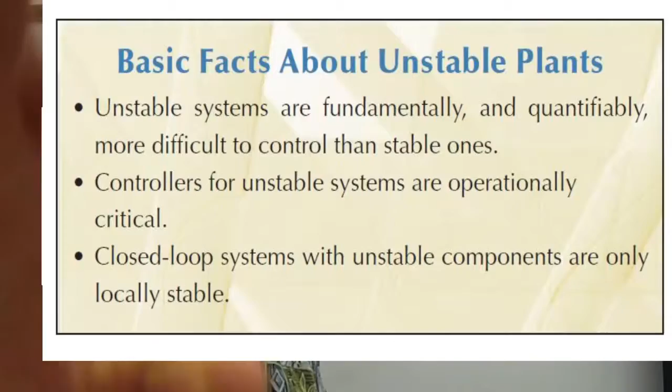So today we're going to start tying everything together and look at loop shaping the way I'm going to teach you. There's a bunch of different ways.

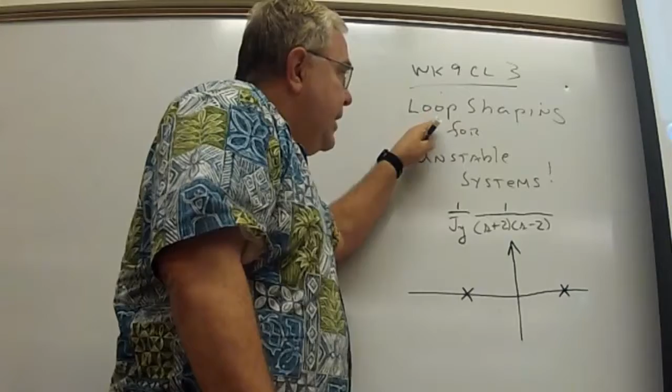But the inner SAS loop becomes crucial when you have an unstable system. It becomes crucial because you got to get these poles back into the left-half plane before you do loop shaping.

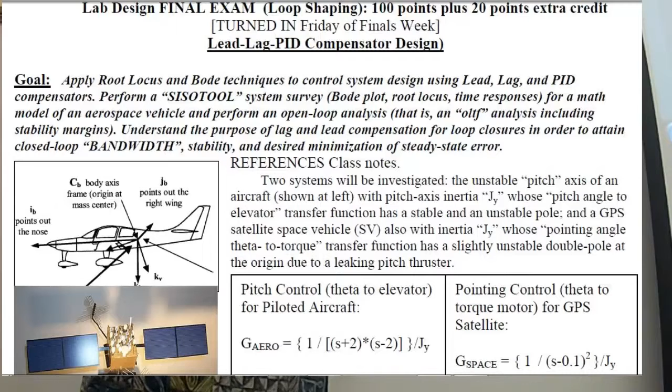And we're not going to deal with the really hard one, if I have a right-half plane zero that's going to suck up that pole, that makes it really difficult. You might have to call Gunter Stein at Honeywell and hire him to fix those problems, or use something like modern control to get started.

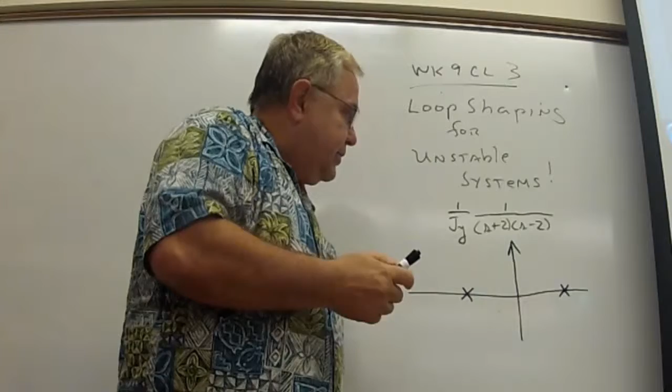So you can see why if I was doing loop shaping in a SAS on this F-16, F-18, any modern fighter that's unstable, you're going to have this type of situation. And the control engineers in the late 70s and early 80s prided themselves on being able to stabilize these systems with electronics, fly-by-wire. So they wanted to put this pole farther and farther out, because the farther out you put that unstable pole, the more maneuverable the aircraft becomes.

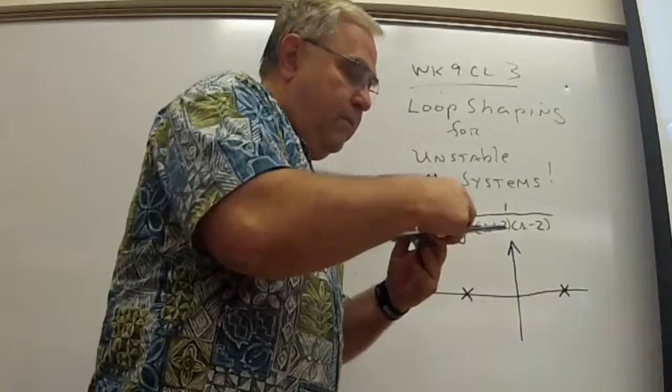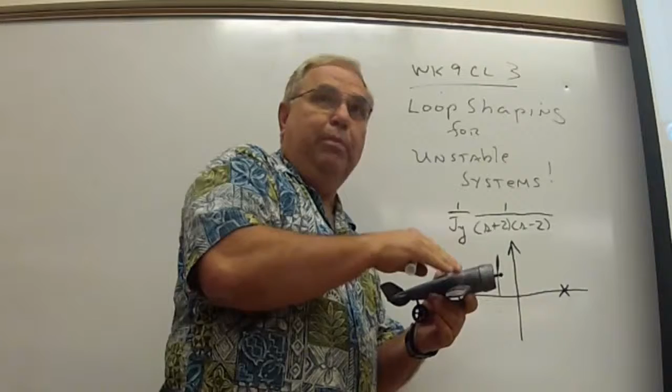It wants to go where you want it to go, like right now. And the F-16 is so maneuverable that I was telling the students last night in the extra office hours, it's so maneuverable that it will black the pilot out before he's aware that he's under a G-load. That's a very bad thing to do.

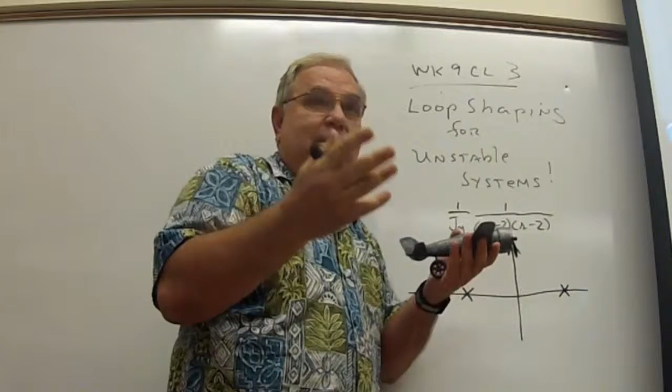Because if you know you're coming under G-load, then you can get your body ready for it. You can tighten up your muscles, you can force your blood, keep your blood up in your head area, up to 6, 7, 8 Gs. 9 Gs for some young men.

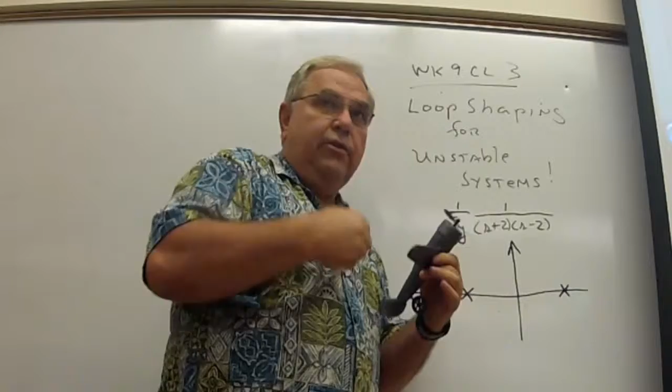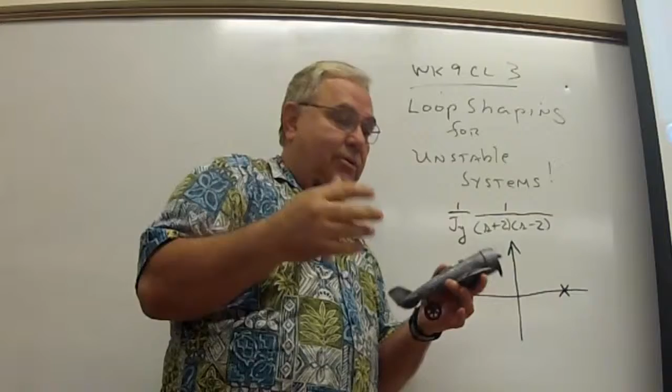But if your aircraft is too maneuverable, and you pull the stick back without warning someone, then you haven't done anything, and your blood instantly goes down away from your brain right away, and you black out with no notice. This happens to many F-16 pilots. Lost a few airplanes that way.

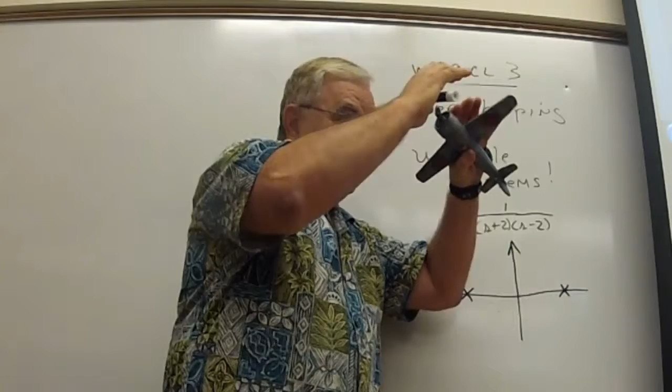Because when you wake up, it isn't like waking up from tunnel vision. Your tunnel vision goes out in the Gs, and then it comes back like that. But when you black out under a highly maneuverable blackout, it's like waking up in the morning. You wake up like you're in bed. Oh, you see the ground rushing up at you, and then you realize it's not a dream. You're actually in that airplane.

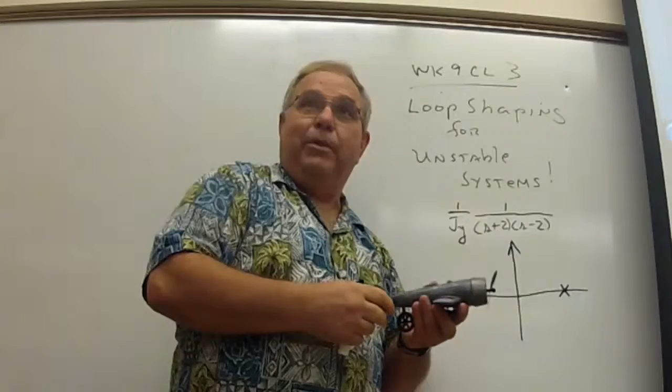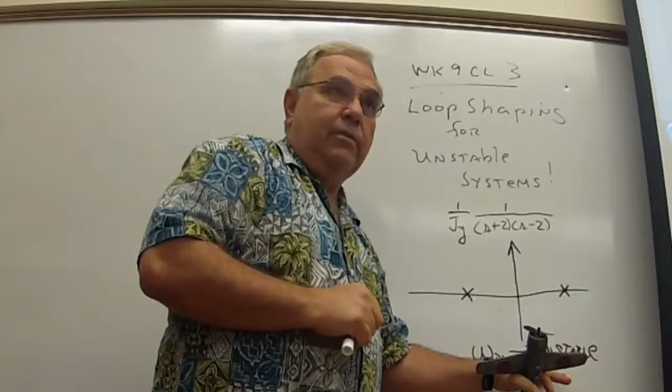So bandwidth now, for unstable systems, when we control them, bandwidth becomes the enemy of stability. The higher the bandwidth, the more problems you're inviting for lots of reasons. That's what we're going to pretty much cover today.

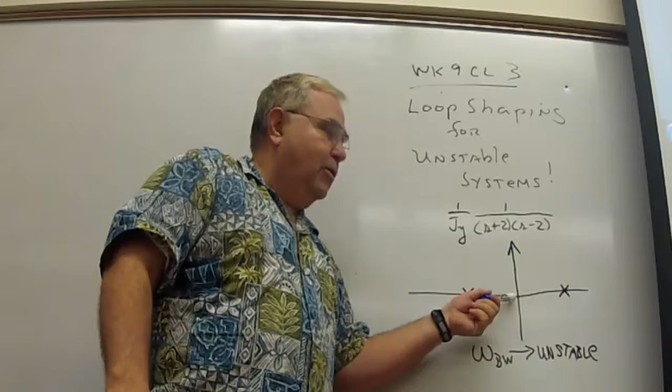If I want to do SAS feedback on this, if I got Mike here, Mike, I want to do SAS feedback, I'm going to put a gyro on this, I'm going to feed back rate, right? The feedback rate, it'll go through an S. So what am I going to put on this diagram if I feed back a rate with an S?

That's going to put a zero here, yes? Right? Now do you see the problem? If you know the root locus rules, you see the problem right away, don't you? The roots are going to go from the pole to the zero. I will never get a stable airplane.

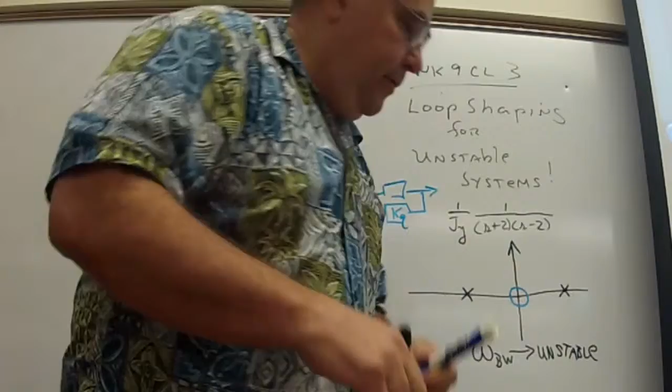So I give you a hint in last year's final. I say build an actuator, and we're going to pretend—we don't have to pretend, but we're going to say that your actuator has a programmable zero. So you have a programmable zero, and your actuator is out here, wherever you want to put it, and has a programmable zero, and you can program the zero from 0 to -5. You can program it. That's part of the problem.

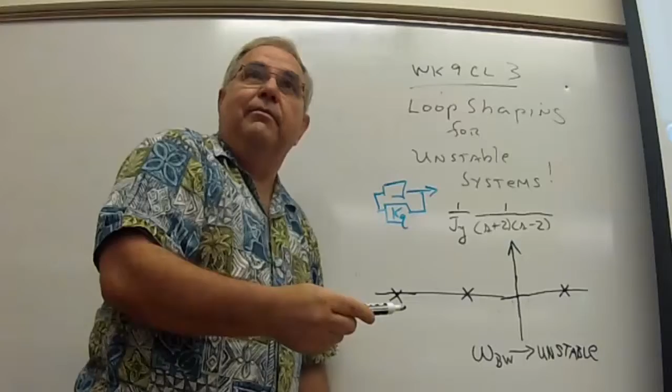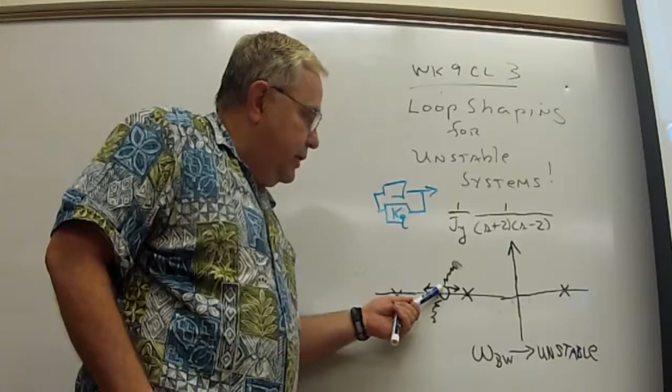Okay? And that will help you now, because now you can see what's going to happen at the low frequency end. These roots are going to come together. This is probably going to go to the zero this way. And with luck, the roots will come up, and they'll come up like this. Yeah, with luck. With luck.

But since it's my inner SAS loop, I'm looking for a bandwidth on my inner SAS loop. Probably what's going to happen is these guys are going to come together like this, and they'll go almost straight up.

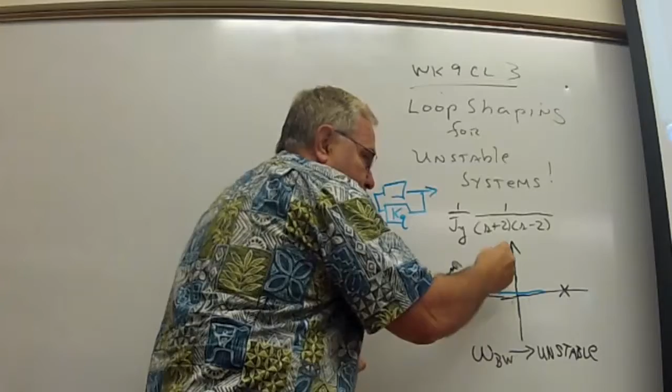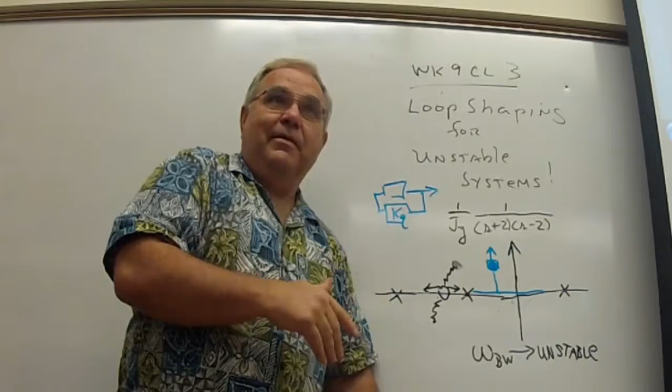I'm not sure what they'll do over here, but you're going to be close to the j-omega axis, so you need to be careful where you pick that inner loop for your bandwidth. The bandwidth requirement is 10 radians per second. We want to make it only as maneuverable as it needs to be, because the unstable situation means this pole always exists there to bite us.

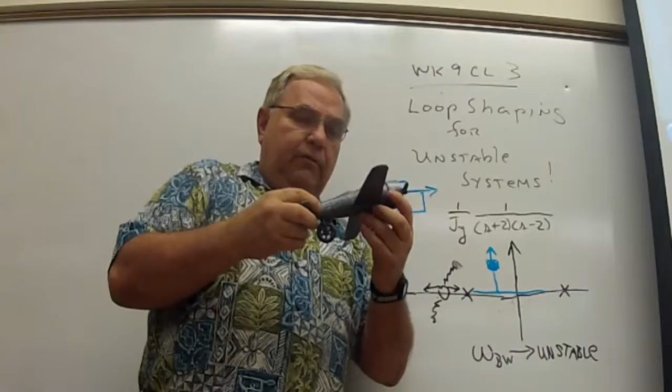Let me give you an example of one way that pole will bite you. This is the second or third example in that video by Gunter Stein. It talks about a Gripen, Swedish Gripen. Every airplane the Swedes make, the same thing happens. Guy's on final approach.

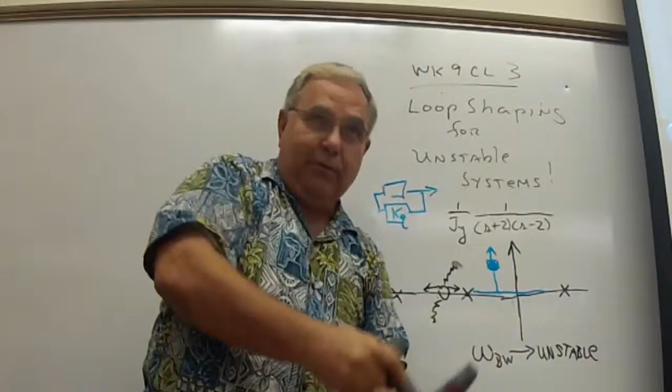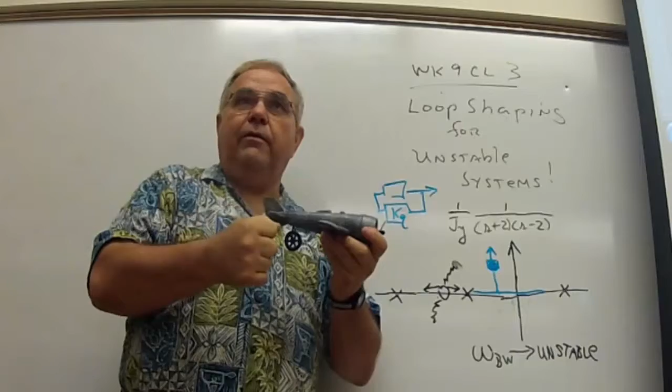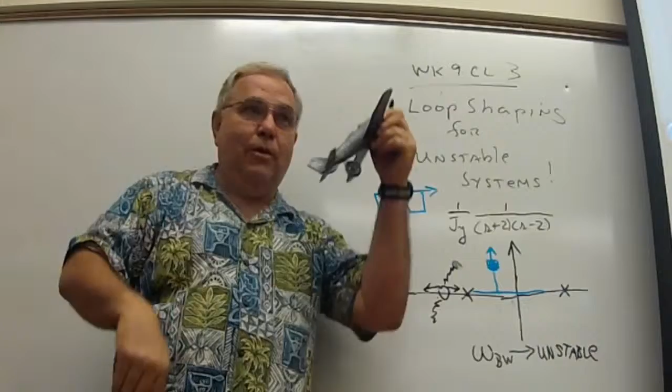He gets into a pilot-induced oscillation, what we call a PIO, gets in his PIO, bails out right before it crashes. Then they go to Calspan Corporation in Buffalo and ask, what happened? They always say the same thing: the pilot got out of phase with the aircraft and was pumping the stick too hard. He depleted the hydraulic system. Once the hydraulic system is depleted, the control surfaces are still moving, but they're exactly out of phase with the motion you've got. And then boom. So they blame the pilot, like everybody does.

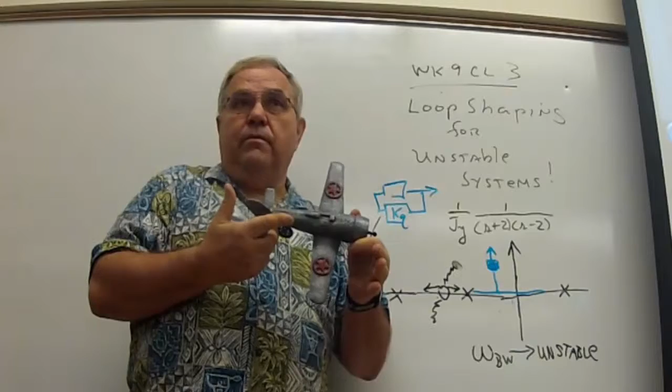They blame the pilot, but it's really the design—the design of the control system. The airplane did not need to be that unstable, one.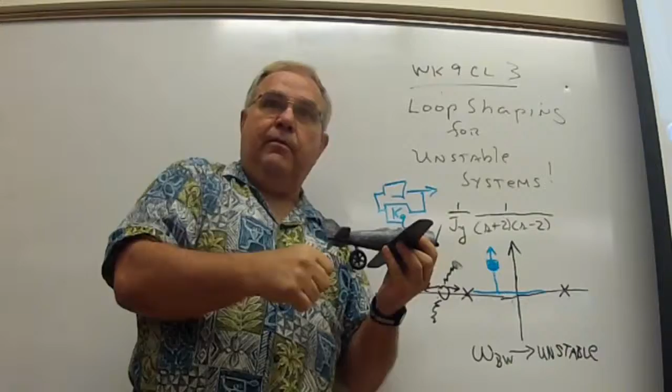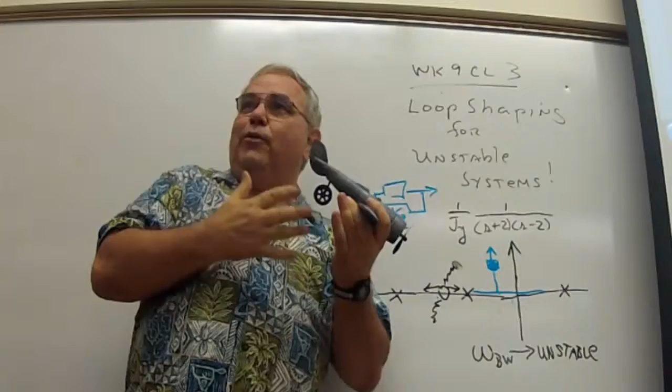And the second thing is, those controls in the cockpit are rate limited. In other words, when you move the stick as fast as you can, the elevator seems to follow your stick, but it's actually rate limited because it doesn't want to break the hinges back there. There's hinge torques that are limiting, so there's some kind of integrator in there limiting how your signal gets back. Well, that rate limiting for an unstable system can be too slow to control it. The rate limiting inherent in a control system may be too slow to control an unstable pole if it's out there too far.

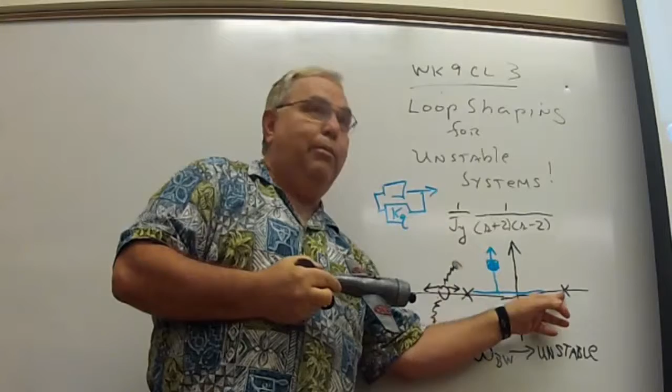And you will lose the airplane. It isn't 'I missed that approach'—it's 'you'll crash.' Best example of that is the Chernobyl example in that video.

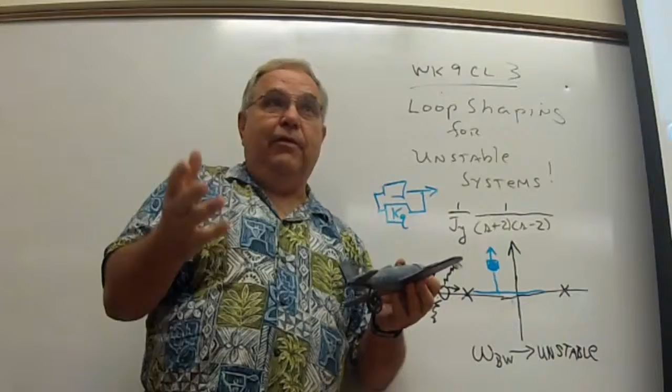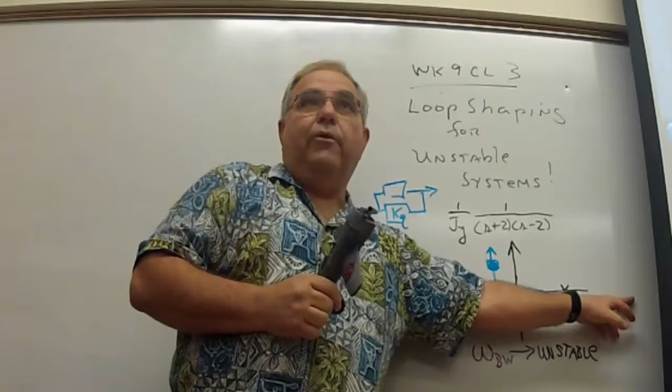If you have time to watch that Chernobyl example, it was a man-made disaster. They disconnected all the control loops because they wanted to play with the nuclear reactor, and they played with it and got into this unstable area. You have to go through an unstable area when you fire up and fire down a nuclear plant—it goes through an unstable situation.

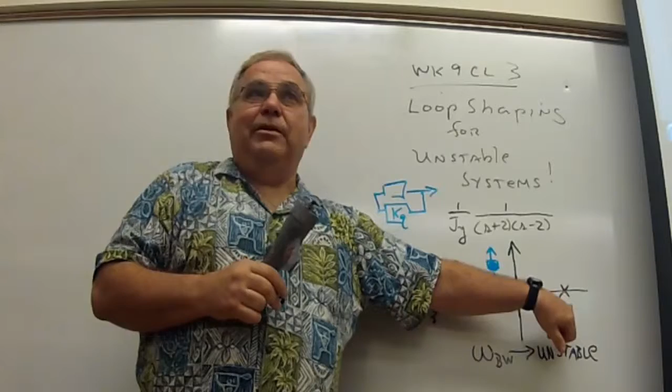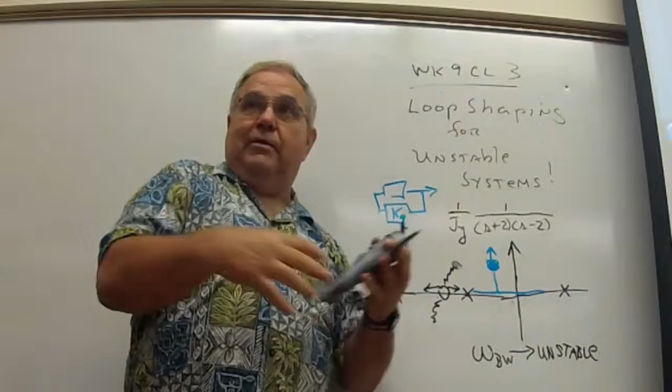It's all tightly controlled, but they disconnected all the controls and put the Chernobyl nuclear reactor right in the unstable condition. When they finally recognized what had happened, just like the aircraft, the steam reaction took off, and they reconnected the control system, but the control rods couldn't go in fast enough. They were rate limited, and the instability blew a 1,000-ton dome off Chernobyl, killed them all, killed everybody in there.

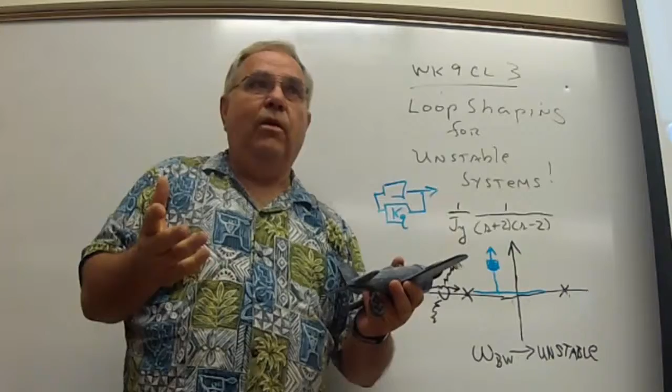And of course, the place is still—this was 1989 or something when that happened—and it's still a black hole in Ukraine. So maybe Putin can have that part of Ukraine. I'm sure the Ukrainians are giving that part back.

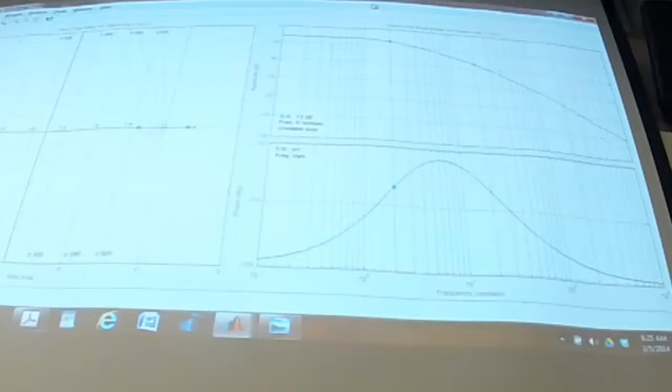So I'm kind of setting the stage for why. Look at the phase curve—it's kind of got weird angles, but look at the bump it's got on it. The more unstable your system is, the narrower that mountain becomes. You see what I'm saying? In other words, if that pole moved out farther and farther to the right, this system would compress like this, and my stability would be almost a spike.

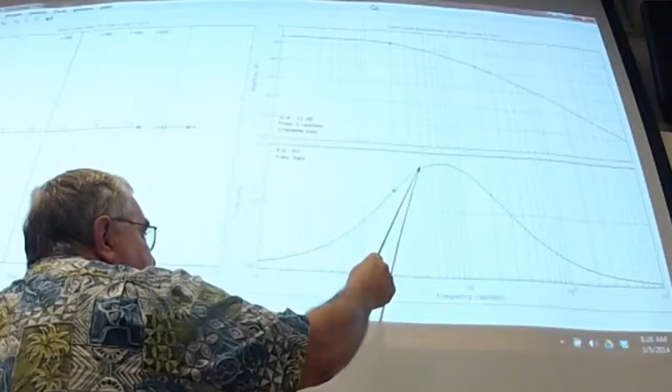Look at the damping, it's 0.14 at the required inner loop bandwidth, and the system is very oscillatory. It's going to have a steady state value close to 1 eventually, but it gives me this nasty oscillation.

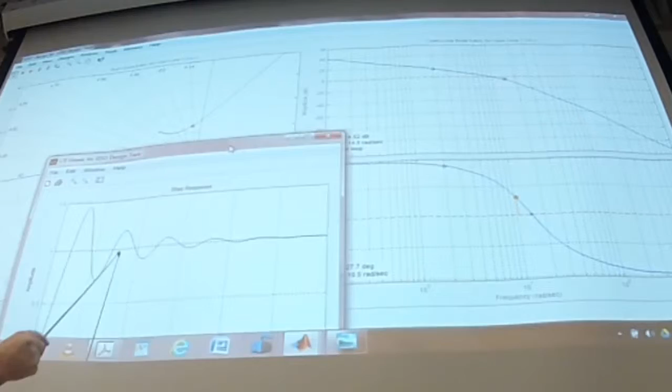The inner loop rise time spec was not met. I can meet all the rest of the specs for the inner loop, but I can't meet the rise time. The control system must be ultra reliable, so I'll lose the airplane if it disconnects. So I need like 4 inner loops, don't I?

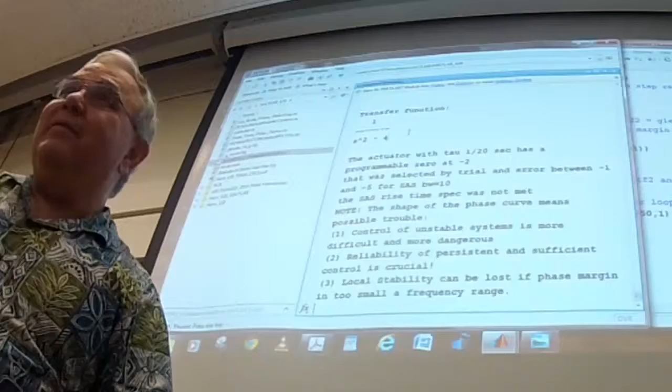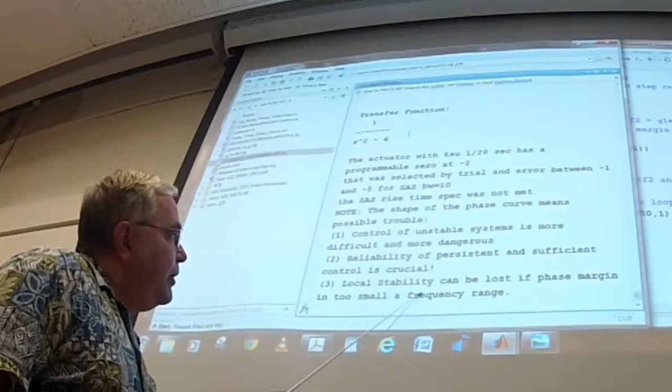I need a quad redundant digital control system, which all airplanes have now. They're flying with digital fly-by-wire. They'll have quad redundant, and they'll boot out the bad computer. So reliability is crucial, and I have to realize that if I go away from my equilibrium condition, control may not be sufficient to bring me back.

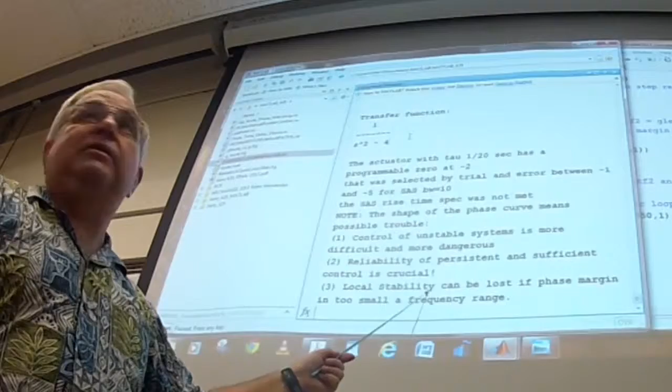So I don't want more bandwidth than I have to have, because more bandwidth means the probability of this third thing happening is more probable. The lower the bandwidth, the less likely that is to happen.

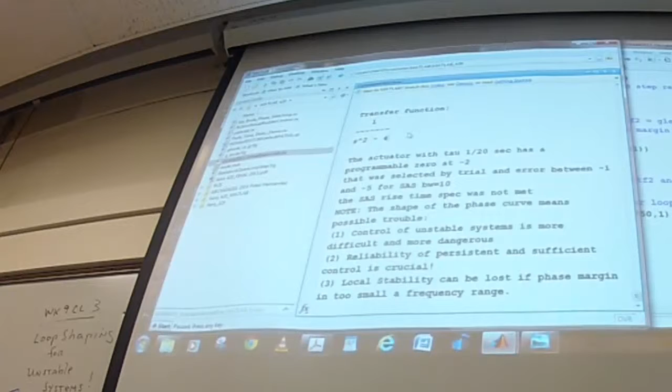So with those 3 caveats, I go in, and this is my inner loop response if I put the roots on the real axis. So I don't quite get the rise time I wanted. I wanted a tenth of a second rise time. This should be a little steeper.

The drone especially, someone's going to say, well, the drone doesn't care, there's no pilot in it. But the laws are still there, the mathematical laws are still there, and you're still going to lose the drone if you make it too unstable. So don't. Those are all arguments against instability and for a lower bandwidth if you can get it.

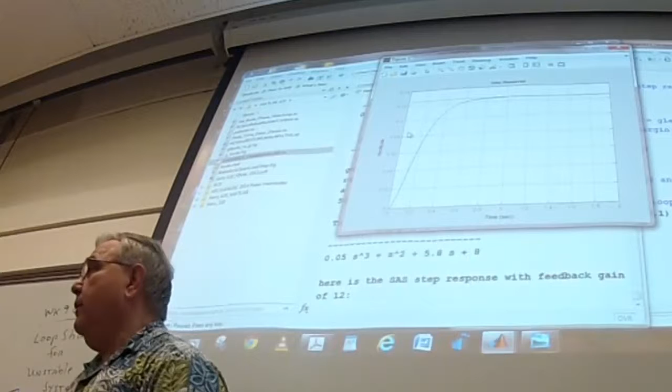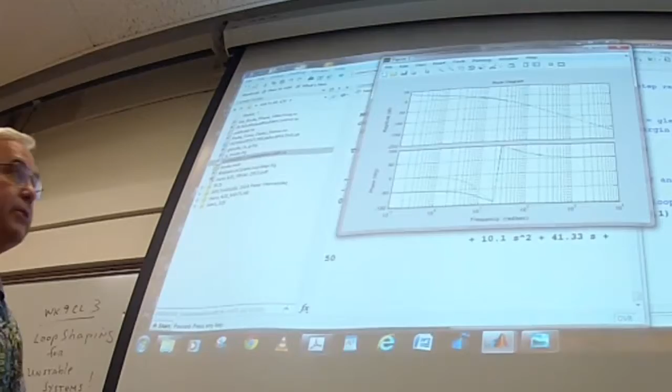So then we'll go into the outer loop one more time with this 6/60. The end result for my SAS with 12, we'll show in a second, but I wanted to show you, if I take my OLTF2 and put a gain of 50 in it, I get the blue line, which gives me a bandwidth of just about 10, around 8 or 9. And here's my closed loop.

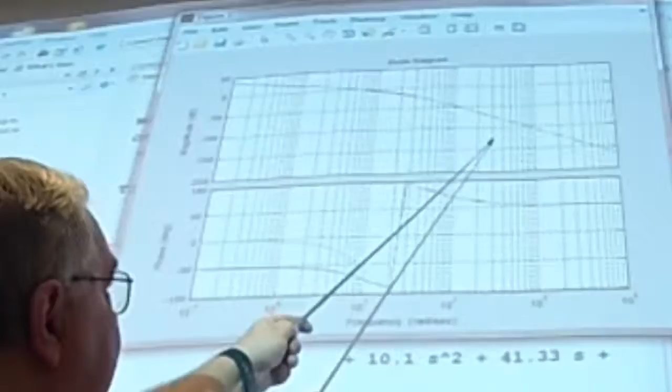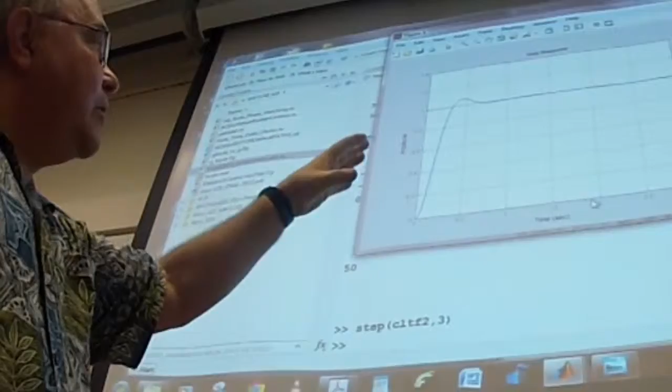This is what I'm being paid for. The closed loop bandwidth's out here, so I'm very close to the bandwidth spec. I'm going to try to sell the customer on this. It's a little lower bandwidth system, which I like, knowing the pitfalls of unstable control. A little bit slower system, and it meets the steady state requirements. It's got 60 degrees of phase margin, and a bandwidth close to 10.

What I'm telling you today, the modern tools that you learn in control theory class hide this fact, right? Look what I can do in Simulink, look what I can build, look what I can do. And then you put it out there, and you're blacking pilots out, and you're crashing airplanes, and the systems are getting lost, and you don't know why.

And then you go back and figure out, oh, I violated Newton's law, which is Bode. Bode is Newton in control, right? You can't violate Bode's laws for control, no matter what new technique you learn in graduate class. You have to meet these fundamental requirements.

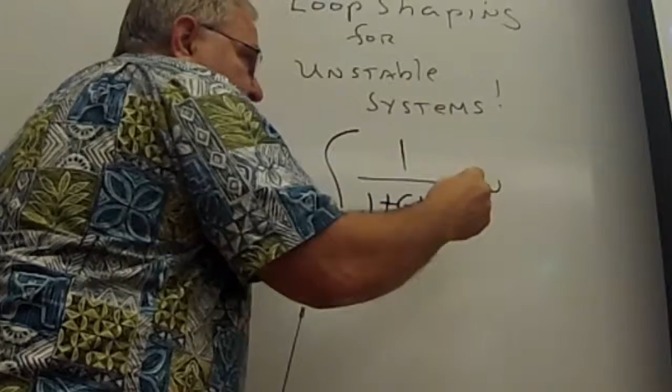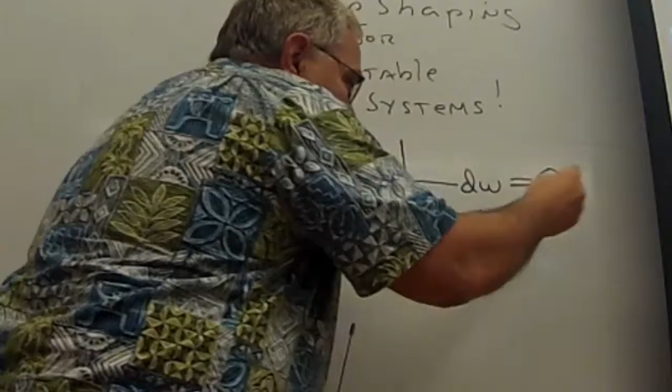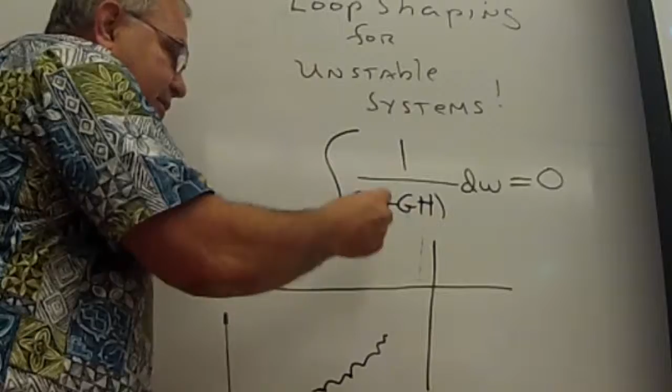The sensitivity function, 1 over 1 plus GH, if you integrate that with omega, that has to come out equal to, well, it depends if it's the log or not, either 0 or 1. If you integrate this thing over omega, if you have low sensitivity in some part of your curve, and you want low sensitivity because that means the output doesn't change when you change your plant, then you're going to have high sensitivity somewhere else.

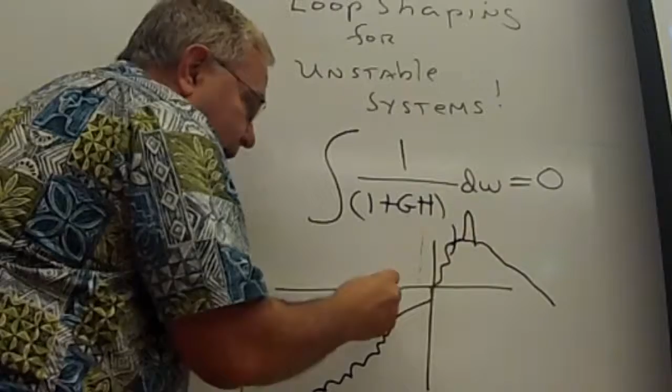And if your sensitivity is too high, you want this sensitivity to be low throughout the usable frequencies, and then the increase of it to occur by the Bode integral out at high frequencies, and you want it to flatten itself out so it doesn't peak at all.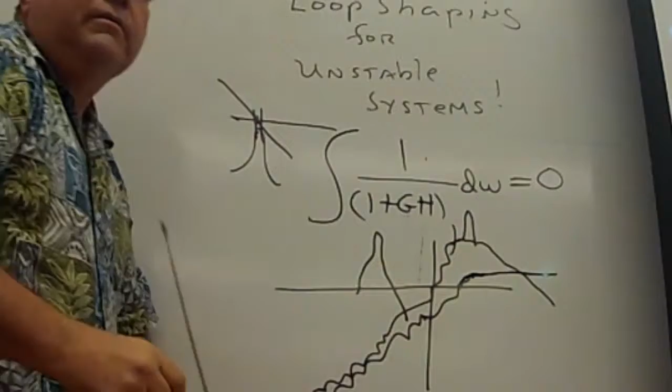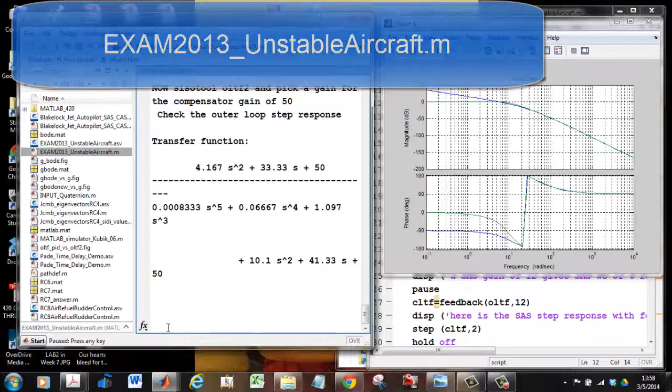So we can actually look at the sensitivity of this. Now I will run the unstable aircraft M file showing you the time response for the inner loop, the outer loop, the Bode plots, closed loop Bode plot, and the sensitivity function as the last plot.